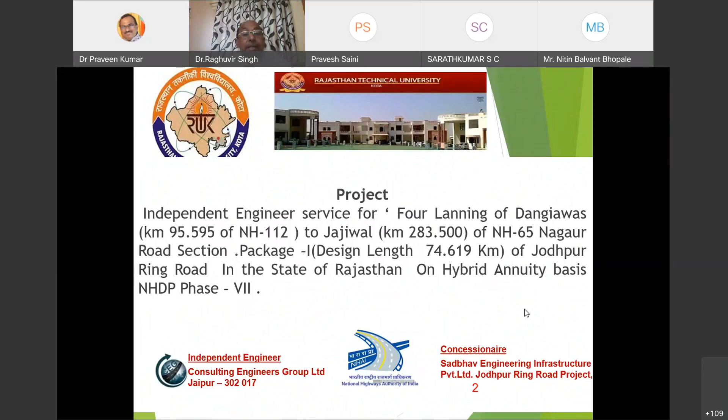Sir, now coming to the topic. Introduction: plastic waste. Plastic is a hazard to the environment. Plastic waste is used in road construction for flexible pavements, used in rural roads under the PMGSY project, and also used in National Highway projects as per circular of the Government of India, Ministry of Road Transport and Highways.

The concept of plastic roads in India: In India, where 50% of the country's roads were unpaved only a few years ago, as many as 14,000 miles of new roads have been installed since India's Ministry for Road Transportation made it mandatory in 2016 to add waste plastic into bituminous roads. India's plastic roads technology grew out of experimentation done in 2001 by Dr. R. Vasudevan, a chemistry professor.

At the Thiagarajar College of Engineering in Madurai. Recognizing the similarity between plastic and bitumen, both derived from petroleum, he mixed the shredded plastic with gravel, then bitumen, and saw a good bonding effect.

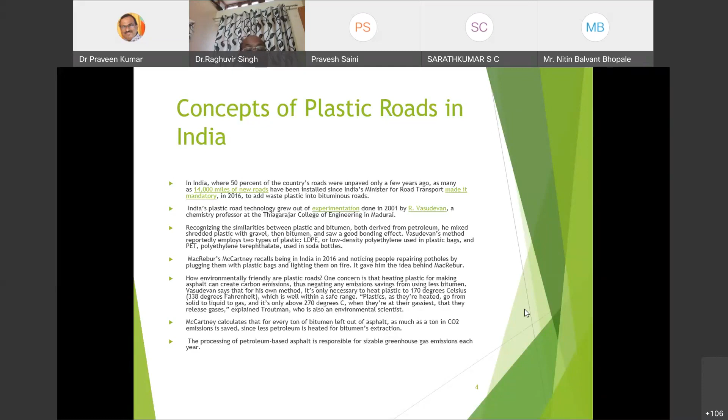Another concern about plastic roads is that they will shed microplastics. No one has yet reported that this has occurred, and those interviewed for this article say they don't see microplastics as a problem. Road material is relatively inert, a solid block of asphalt, noted Troutman.

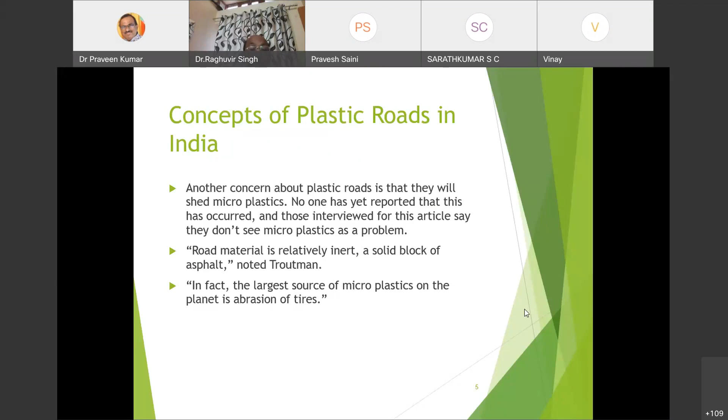In fact, the largest source of microplastic on the planet is abrasion of tires, trucks, or buses, which develop hydrocarbons in that process. Sir, I have also worked on PMGSY roads in the state of Madhya Pradesh, including the Gunga Road in the district of Bhopal, Madhya Pradesh.

These are views of the roadway construction with new technology, plastic waste, on Gunga Road, Bhopal - State Highway 21, which was under construction. A few laboratory tests were conducted with VG30 grade bitumen mixed with waste plastic used in that road. There is a big laboratory at site at Gunga state road, and the PWD state government quality control team is watching frequently.

Sir, there was a presentation on use of plastic waste in bitumen roads for Madhya Pradesh state road projects. This is also the presentation on use of plastic waste in bituminous roads construction.

Sir, this is my Ring Road project in Jodhpur. Initially from 00 Jodhpur and ending at 74 chains near IIT, connected to the Jaisalmer bypass. That is a totally 4-lane road, and we are using VG grade 30 bitumen for the DBM road and BC top layer, BC grade 2, constructed with VG30 bitumen adding plastic waste.

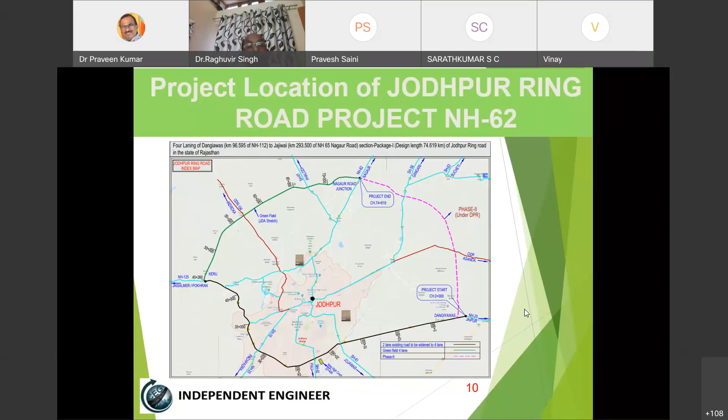So continuing - what is plastic? A material that contains one or more organic polymers of large molecular weight, solid in its finished state, and at some state while manufacturing or processing into finished articles can be shaped by flow. The types of plastic are thermosets, elastomers, and thermoplastics.

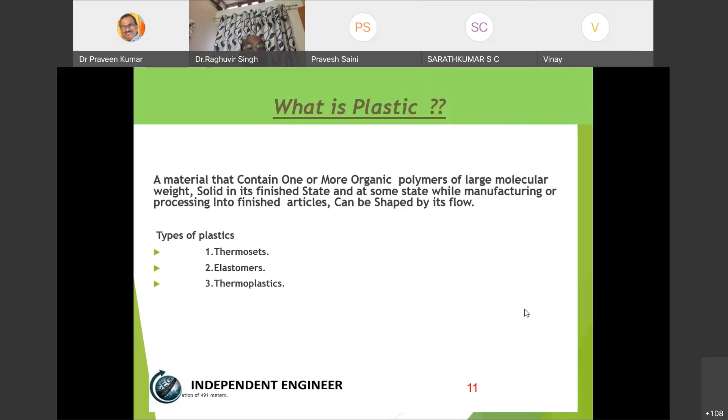Sir, there are natural resins - solid or semi-solid materials, light yellow to dark brown in color, containing carbon, hydrogen, and oxygen, globulous on the bark - or synthetic resins, derived primarily from petroleum products like polystyrene, polyesters, and acrylic, used in the manufacture of varnishes, plastic adhesives, and rubber.

The various resins of plastics are polyethylene terephthalate (PET/PETE), high density polyethylene (HDPE), polyvinyl chloride (PVC), and low density polyethylene (LDPE).

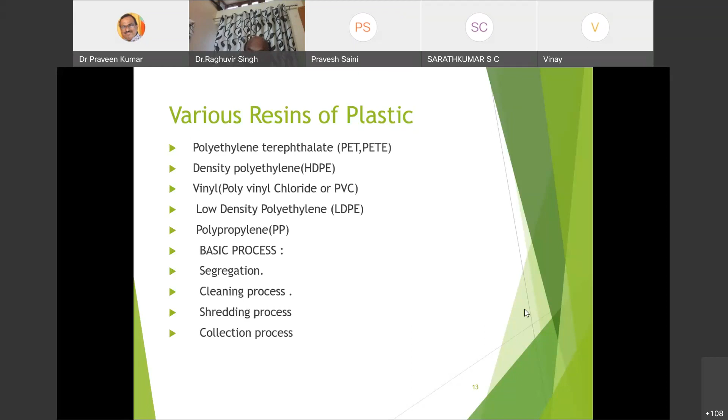The basic process involves segregation, cleaning, shredding, and collection. In the segregation process, the plastic waste collected from various sources must be separated from other waste. Maximum thickness of that is 60 microns.

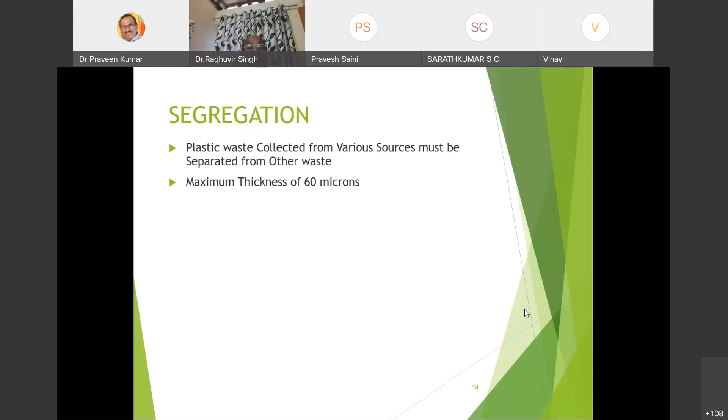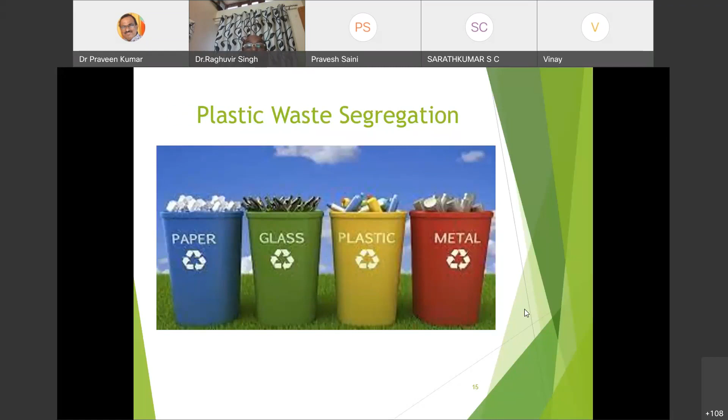Now the cleaning process - the plastic waste gets cleaned and dried. Skilled laborers are collecting and cleaning that.

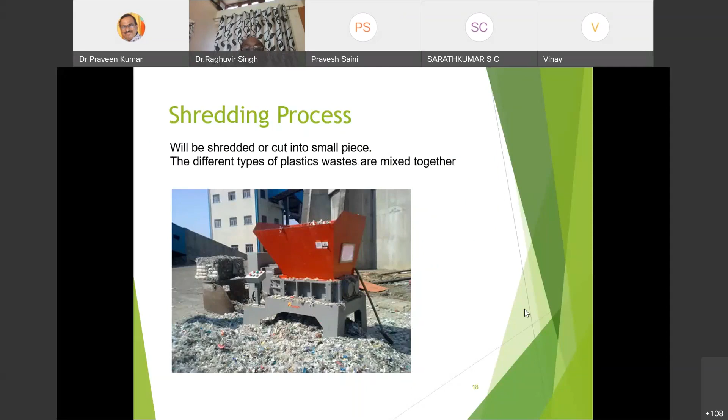In the shredding process, the plastic full size bottles or polythenes are shredded into crystal form, cut into small pieces. Different types of plastic waste are mixed together. These are the shredded waste plastic in crystal form.

The collection process - plastic waste retaining on the 2.36mm IS sieve is collected. This is the waste collection: the first photo shows waste collection, the second is dismantling, the third is air drying and breakdown, and the fourth is hand grinding for the collected plastics.

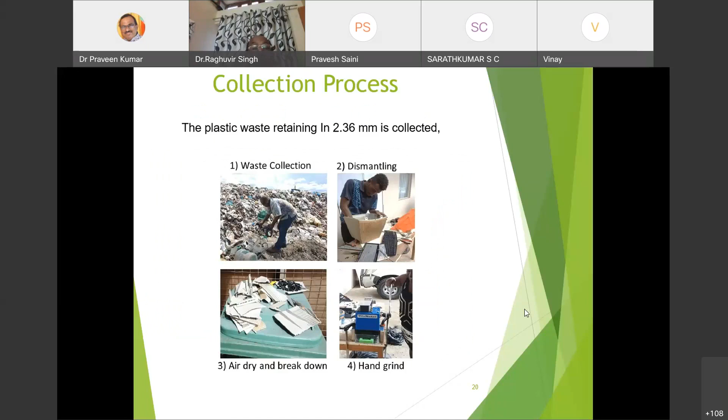Field trials - there are two types: first is the dry process, second is the wet process. Sir, first is the dry process, shown here.

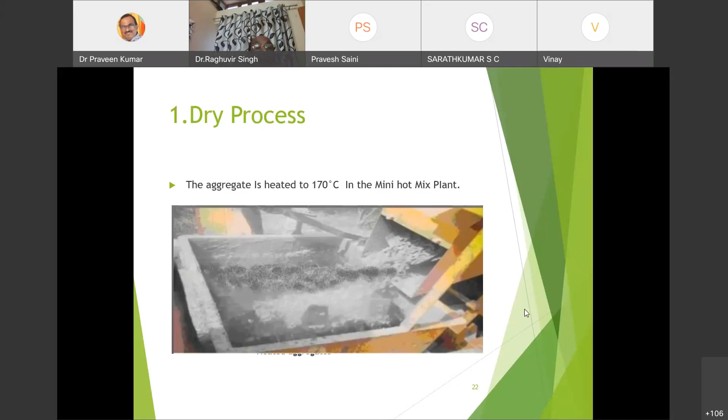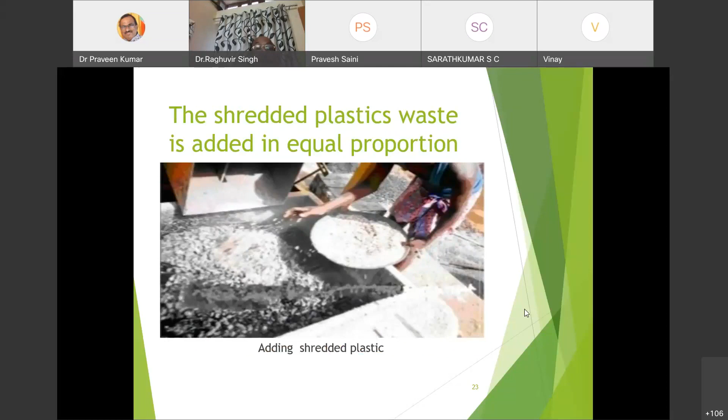The aggregate is heated to 170 degrees centigrade in the hot mix plant, or mini hot mix plant, as per requirement of quantum of work. The shredded plastic waste is added in equal proportion, shown here. Immediately the hot bitumen VG30, VG40 or 80/100 grade, 160 degrees centigrade, is added into the plastic. The aggregate-plastic-bitumen mix is shown here. The mixture is transferred to the road and the road is laid.

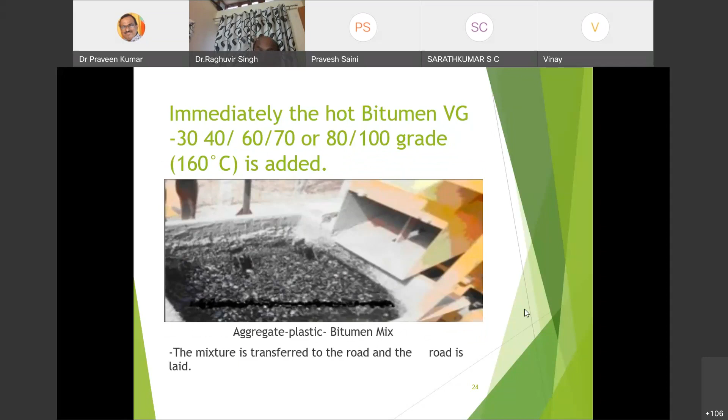Now the wet process - waste plastics by direct mixing with hot bitumen at 160 degrees, and mechanical stirrers are needed because sometimes bitumen settles down, so continuous agitators and stirrers are required, along with addition of stabilizers and proper cooling. Since the wet process requires a lot of investment and bigger plants, generally the dry process is used in India, where the wet process is not commonly used in our projects, sir.

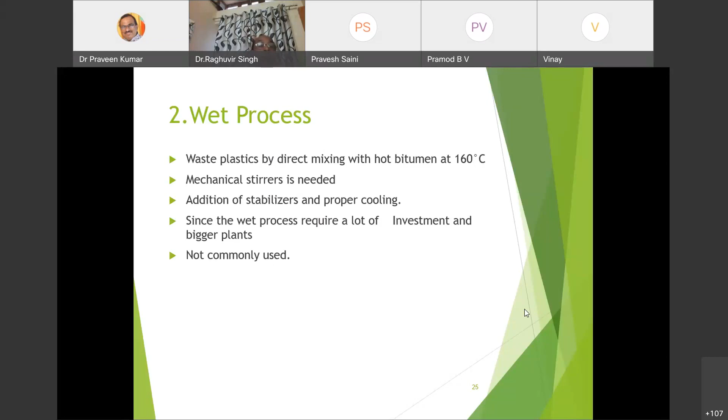Sir, these are some of the aggregate test results used in our project highway, Jodhpur Ring Road project. The source of aggregate is near the Jodhpur to Pali Road. Kakani is the source of quarry. Its lead is around 30 to 50 kilometers from Jodhpur, around 5 kilometers inside from the main road.

The Los Angeles test was conducted in our site laboratory, in-house laboratory, as well as third-party NABL accredited laboratory testing. The abrasion value of that aggregate is found at 18.90%. The maximum Los Angeles permissible value is 35 for DBM cases. Impact value found 13.01, which is 25 for BC cases and 27% for DBM cases.

Now the shape test was conducted, so that test is within the permissible limit. In the shape test, flakiness index of combined value was checked, that was found as 29.89%. The permissible limit is around 45%. Elongation test is not required. The water absorption of that aggregate is 0.18, which is very less than 1%, meaning the aggregate is black basalt and very sound aggregate.

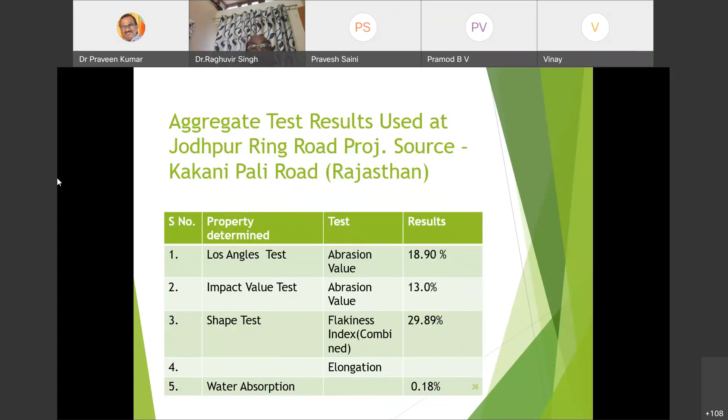Bitumen VG30 is procured from refinery IOCL and HPCL directly from Panipat refinery. Test results are tabulated as under. The bulkers or tanks are directly carried out from the refinery. The invoices are available with the tanker, and laboratory test results of refinery are attached also with the invoice.

Then, when the tanker reaches our site or base camp laboratory, a representative sample is collected from the tanker in the presence of independent witnesses, NHAI (National Highway Authority of India) representative or concessionaire's representative. The sample is then sent to in-house site laboratory for performing relevant tests: penetration test, softening point test, absolute viscosity, kinematic viscosity, flash and fire point, etc.

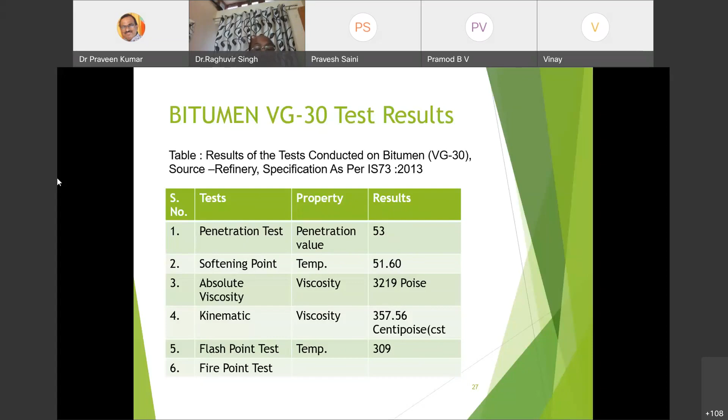Waste plastic carried out from Indore, some commercial industries. Some of the properties of plastic are available here. The binding property: plastic is a good binder. Percentage of plastic coating over aggregate.

So first case, we have checked for the compressive strength in megapascal and binding strength. When plastic coating is 10%, the compressive strength achieved is 250 and bending strength 325 megapascal. With additional quantity up to 20%, compressive strength was found 270 and binding strength 335. Again with 30% plastic coating, compressive strength increases up to 290, and binding strength increases to 350.

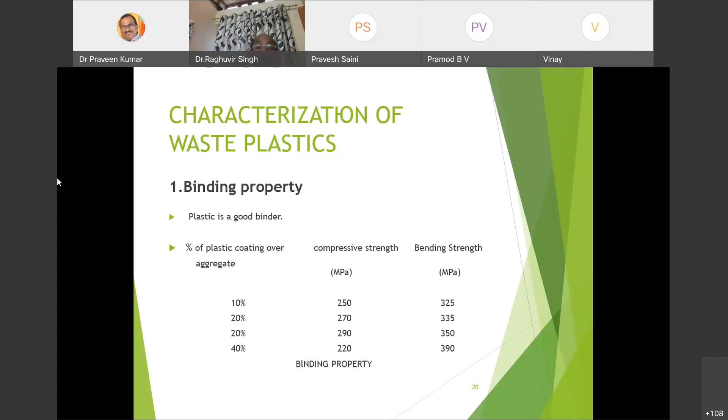Till 40% plastic coating, the compressive strength of the aggregate reduces, becoming 220, and bonding strength of the mix increases up to 390.

Sir, there is some thermal study of plastic waste crystals that showed for polymer: solubility, softening point or product reported, decomposition temperature and products reported, ignition temperature and products reported. For polymer PE, solubility in water is nil, EPT is nil, softening point temperature in degrees centigrade ranges from 100 to 120. No gas is produced, and decomposition temperature is 270 to 350 degrees, with methane and ethane gas alkali reported.

Ignition temperature range is more than 700 degrees centigrade. The same applies for PP and PS.

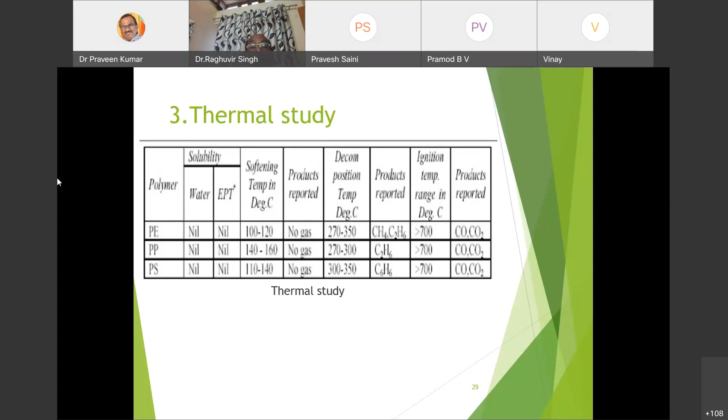The characteristics of polymer modified bitumen that was used on our relevant project road, the PMGSY road at Madhya Pradesh state or Bhopal, that road used PMB 40, and that was the property of polymer modified bitumen. This means the use of higher percentage of plastic in polymer modified bitumen is not favorable.

So percentage of plastics study was practically done at 1%, 2%, 3%, 5% and 10%. The ductility, penetration, and softening point results are available here. For 1% plastic, the ductility is 64, penetration value 95, and softening point up to 54.

At 2% plastic, when percentage increases, ductility reduces to 55, penetration also reduces to 90, and softening point reduces to 50.

At 3%, ductility reduces to 20, penetration reduces to 80, and softening point reduces to 50.

With percentage of plastic increasing up to 5%, ductility reduces to 11, penetration to 55, and softening point to 72.

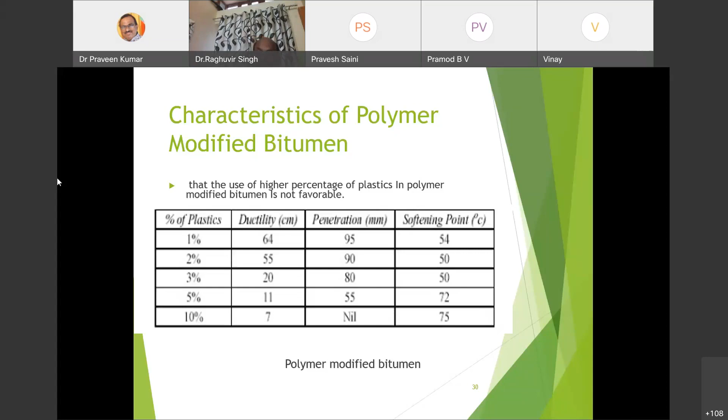Sir, characteristics of plastic coated aggregate: aggregate impact value. Plastic improves the aggregate impact value and helps to improve the quality of flexible pavement. The normal aggregate impact value was checked, that was 25.4%. Then adding plastic waste with bitumen at 1%, the aggregate impact value reduced from 25.4 to 21.20. So the impact value reduced, it means the aggregate is more sound.

Now the percentage of plastic is increased up to 2%. So again the impact value of the aggregate mix is reduced to 18.5%. That means the hardness or strength of the aggregate is improving in that case.

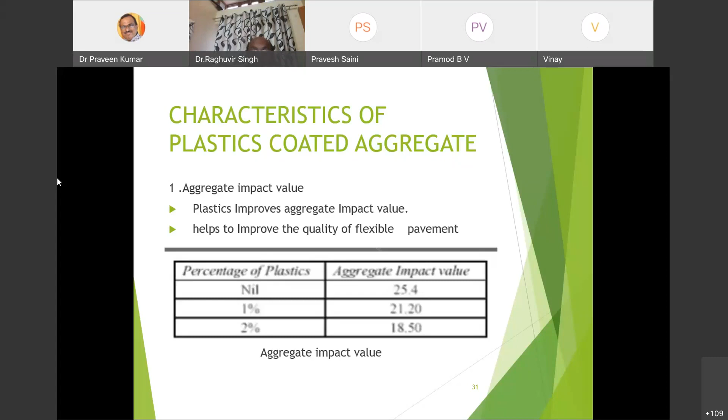The Los Angeles abrasion test value. The wear and tear values of plastic coated aggregate are found to be decreasing with the percentage of plastic. It is 37% without plastic, 32% with 1% plastic, and 29% with 2% plastic. The soundness test was also performed. The plastic coated aggregate did not show weight loss, an improvement in the quality of the aggregate.

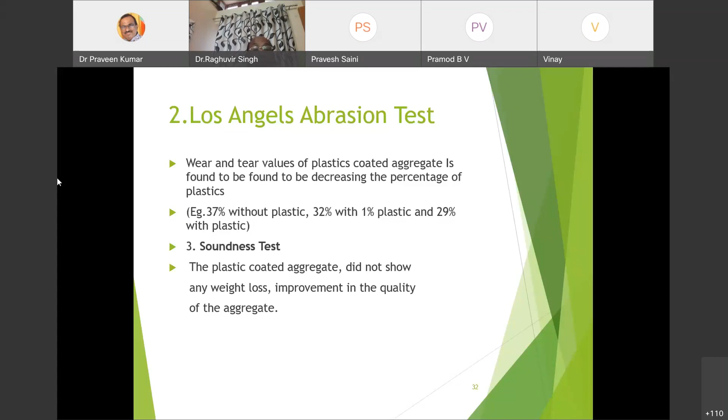So now the advantages of plastic roads. Use of a higher percentage of plastic waste reduces the need for bitumen by around 10%, increases the strength and performance of the road, reduces the cost by around Rs 5,000 per kilometer of single lane road, generates jobs for rag pickers, and develops a technology which is eco-friendly.

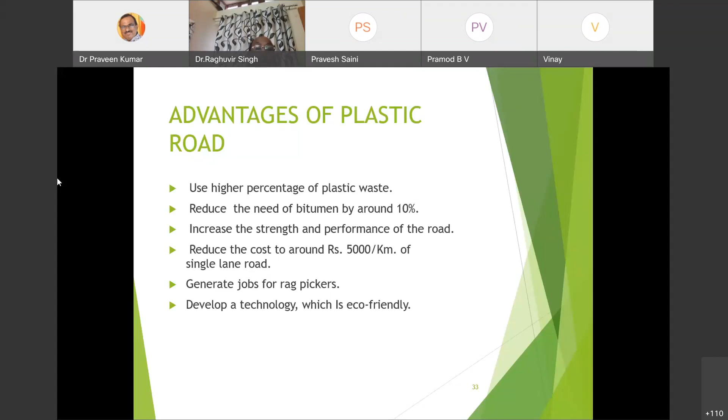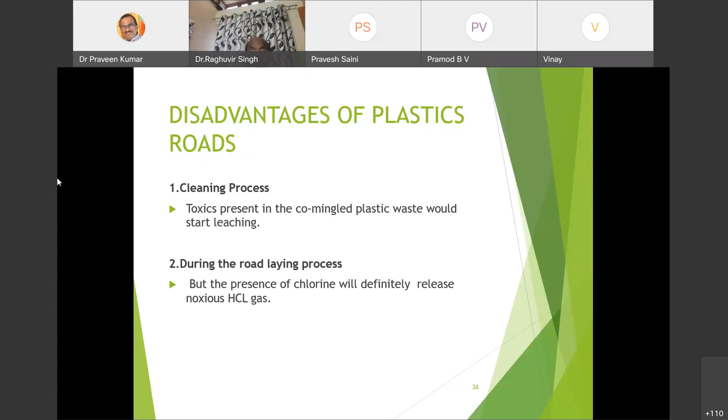Disadvantages of plastic roads: in the cleaning process, toxics present in the commingled plastic waste would start leaching during the road laying process, and the presence of chlorine will definitely release noxious HCl, hydrochloric gas. After the road laying, the components of the road, once it has been laid, are thinner. It is apparent that the first rain will trigger leaching, as the plastic will merely form a sticky layer. Mechanical abrasion, once the road starts to be used, will cause the release of fine polymer particles. When airborne, these will cause a particulate problem.

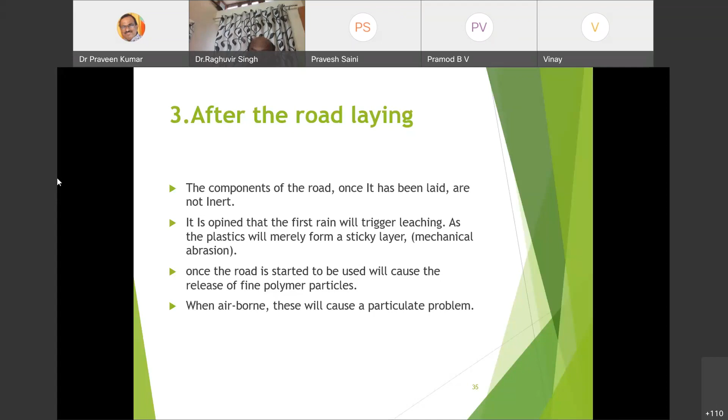Generally, roads in India are constructed in basic widths of 3.0 meter, 3.7 meter, and 4 meter. So consider a 1 kilometer length road of width 3.75 meter. It uses bitumen approximately 21,300 kg for new work and less for upgradation. The cost of bitumen is Rs 8,400 per drum of 200 kg, so the cost of bitumen is 42.0 per kg.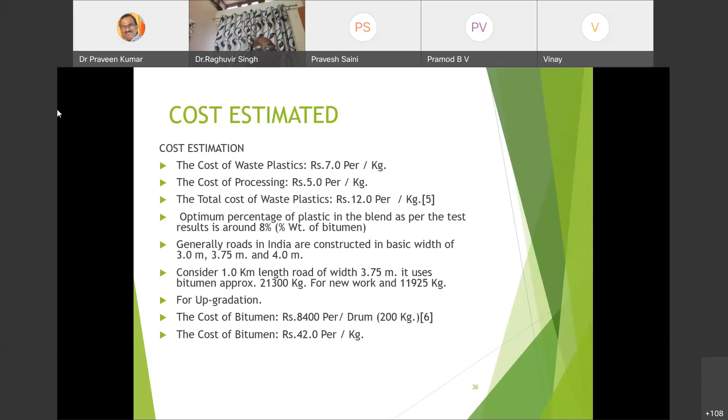The cost is estimated. For the cost of new roads per kilometer, including BBM, carpet, and seal coat, the bitumen required is approximately 21,300 kg. Cost of bitumen in new work is 8,95,000 per kilometer. Waste plastic co-processed with bitumen for PMB at 8% by weight. Cost of waste plastic used is Rs 20,450. Cost of bitumen saved, 1704 kg equivalent to plastic used, Rs 71,550. So total saving per kilometer is rupees 51,100.

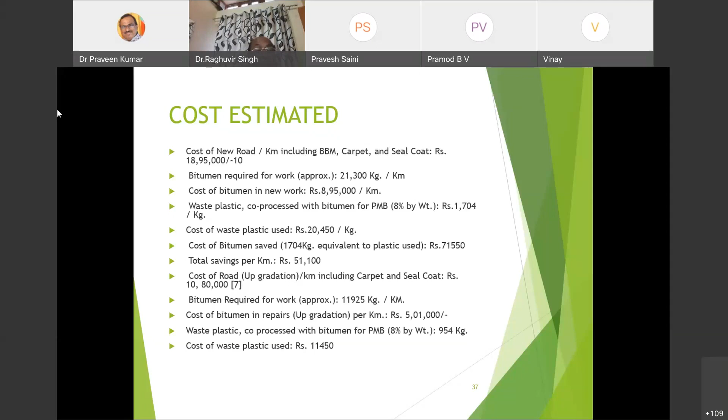Cost of road upgradation per kilometer, including carpet and seal coat, is Rs 10 lakhs 80,000. Bitumen required for the work is approximately 11,925 kg per kilometer. Cost of bitumen in repairs or upgradation per kilometer is 5 lakhs 1,000. Waste plastic co-processed with bitumen for PMB at 8% by weight is 954 kg. Cost of waste plastic used is 11,450.

The performance comparison of waste plastic modified versus conventional bitumen roads: a case study for Pune city. During December 2016 and January 2017, various roads of Pune city were overlaid with a bituminous mix containing shredded waste plastic at 8% of the weight of the mix. The study compares the in-service performance of these plastic roads with similar-traffic conventional bituminous roads, with 80/100 grade bitumen or VG grade bitumen, laid during the same period, in terms of their deterioration rates, in Pune city, Maharashtra, India. To fulfill this objective, the following methodology was adopted.

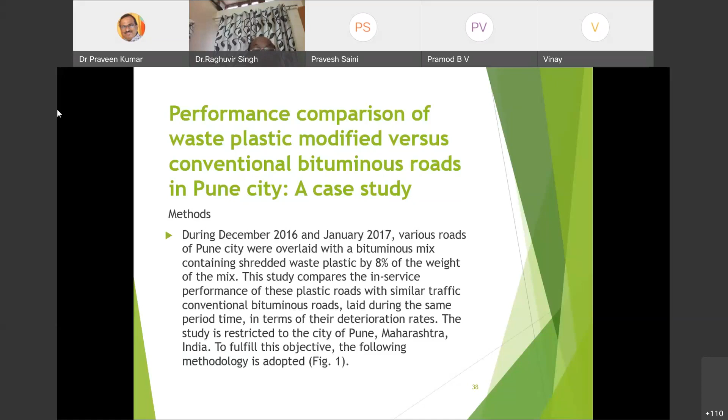The performance comparison. These roads were constructed after testing and review of literature, with the selection of material for testing plastic, bitumen and aggregate. Pavement inventory was done for various tests, and field tests were performed by cutting cores to check field density and field dry density, and a pavement distress study was carried out with a roughness survey and a Benkelman beam deflection survey.

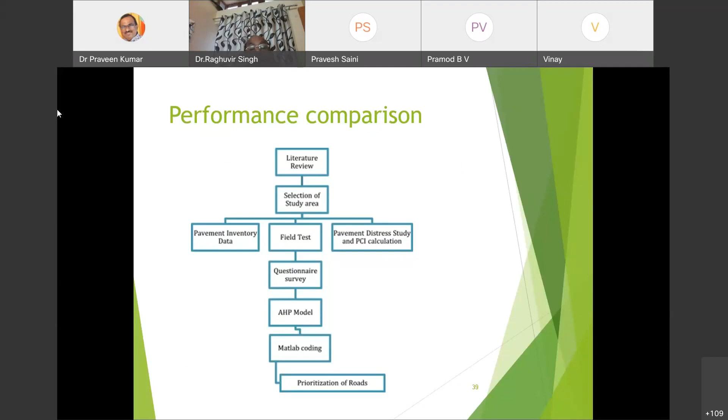The field distress test was conducted on that road, and for the deterioration parameters of flexible pavement, the following were carried out, which can fairly accurately predict the conditions of roads. So the Benkelman beam deflection survey test was conducted. The test was performed as per TRRL Report 833, or BBT, used to determine the viscoelastic property of the bituminous layers. The tolerance value of a good bitumen road lies between 0.5 to 1.

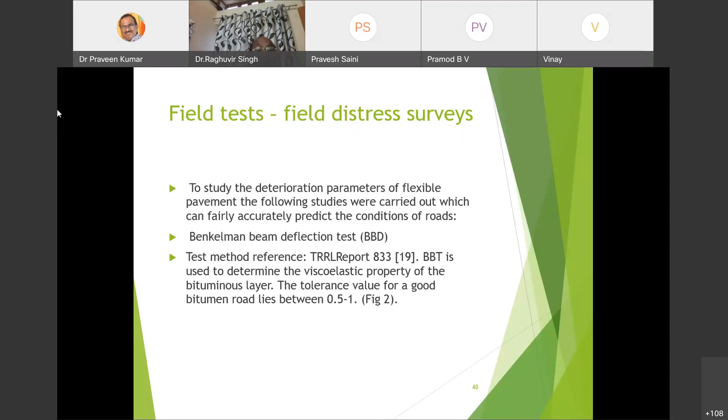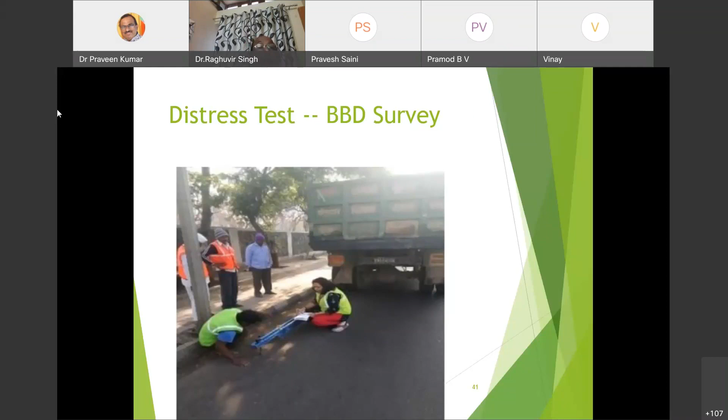So that's why the distress test, the BBD test, was conducted on the new road construction with bitumen mixed with waste plastics. The BBD survey is here, and the skid resistance and roughness survey was performed by Benkelman beam, fifth wheel bump indicator, and roughometer.

Skid resistance is the force developed when a tire that is prevented from rotating slides along the pavement surface. So skid resistance is measured in the form of friction measurements such as a friction factor or skid number. The surface texture of the road layer determines the skid nature of a road, mainly in wet conditions. The skid resistance of the road was determined as a skid number and compared with the reference value. Lower the skid number, higher is the skid resistance. An approved skid number as per Codal provision IRC specification is less than 65 for a well-performing road.

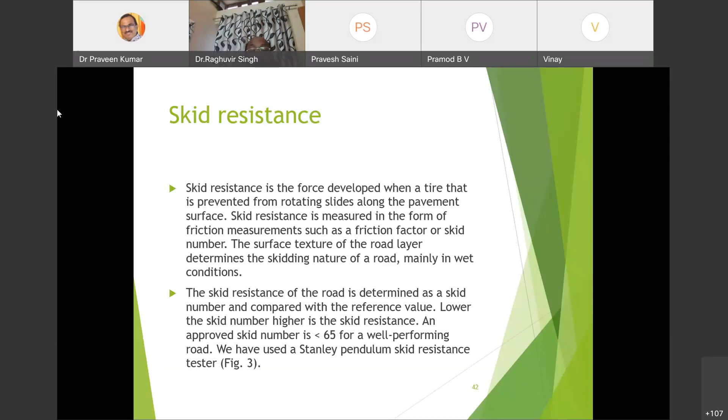The Stanley pendulum skid resistance tester was used to check the skid resistance. This is the equipment of the Stanley pendulum skid resistance tester. The roughness test by bump indicator. Roughness is a significant pavement characteristic as it affects not only vehicle delay and cost, but also riding quality, fuel consumption and maintenance costs. Roughness data are collected using a towed fifth wheel bump indicator running at a speed of 32 km per hour on selected stretches.

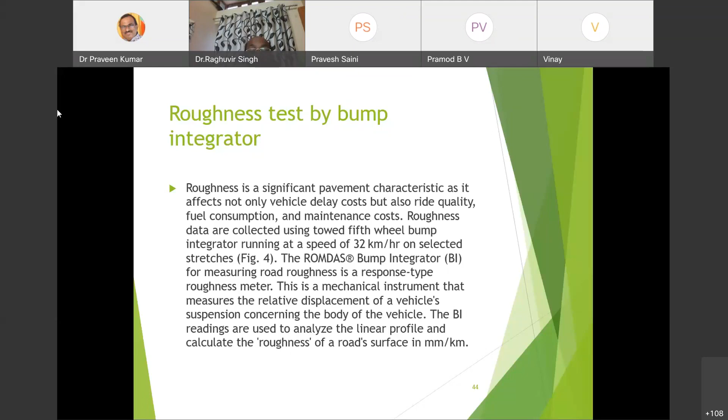The ROMDAS bump integrator, BI, for measuring road roughness is a response type roughness meter. This is a mechanical instrument that measures the relative displacement of a vehicle's suspension concerning the body of the vehicle. The BI readings are used to analyze the linear profile and calculate the roughness of a road surface in mm per kilometer. Fifth wheel bump integrator data is available. This is the fifth wheel bump integrator to evaluate roughness in mm per kilometer.